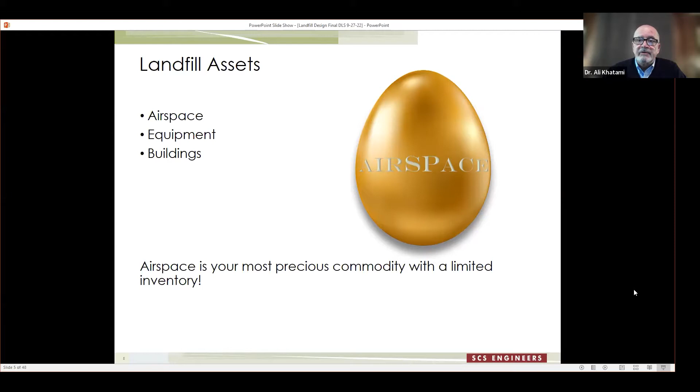As we all know, it is almost impossible to come up with a greenfield landfill site nowadays, unless the owner wants to spend a ton of money over a very long period of time to overcome all the hurdles associated with regulatory, zoning, public opposition, and all of those over a very long period of time. And if they get lucky, they will end up with a greenfield site for a landfill. Short of that, it's the existing landfills. Existing landfills are the primary assets for solid waste operations, management of waste for the communities and serving the communities.

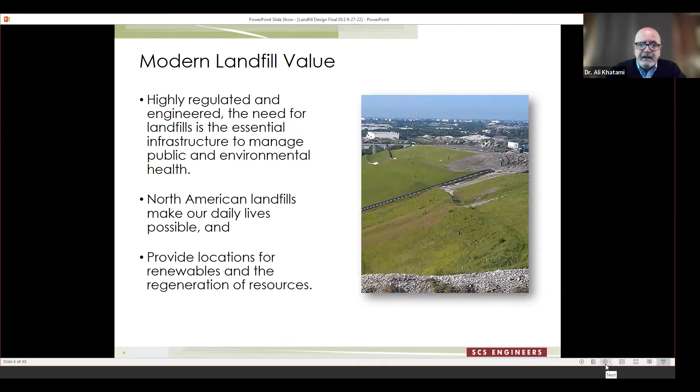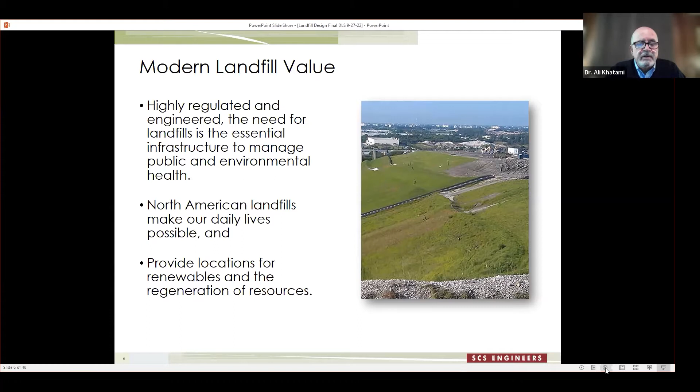And we all know that the cost of disposal keeps growing because the cost of fuel keeps growing, the cost of materials to construct the landfills keeps going up, wages are going up. So as a result, the cost of disposal keeps going up while we have a limited airspace available according to the permit. Recycling and beneficial reuse of waste is certainly helpful in the process, but there's always some residuals that have to go into the landfill. And over time, it adds up. It's a large quantity that has to be managed in landfills.

So it's essential that we make the life of the landfills longer than what they may already be in accordance with the permit, and try to maximize the life of the landfills. That plays an important role in the prosperity and economic growth of the communities, whether it is a private sector landfill or a public sector landfill. In both cases, these landfills provide an essential service to the communities around the landfills and beyond.

On the planning side of landfills, I have seen, for example, through RFPs or communications with the municipalities that are owners of the landfills, many cases where they plan for an expansion to an existing landfill for 20 years of life or 30 years of life. That's good and dandy, but keep in mind that 20 or 30 years is not a very long time when it comes to landfill systems.

It may sound like an extended period of time when you're at the beginning of a 30-year period, but when you go into this process 10 or 15 years down the road, the remaining life doesn't seem impressive in the long-term planning of the landfill. So our recommendation is go for the largest amount of life you can for your landfill, way beyond 30 years, because life goes on beyond that, and the community needs service from landfills beyond 30 years.

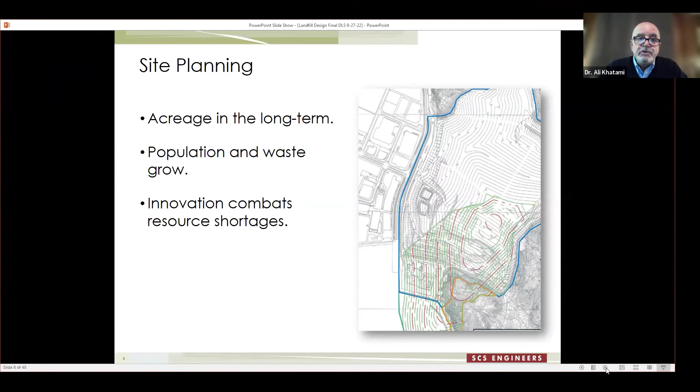So it is important to innovate, it is important to come up with new ideas. In general, we have come up with three-step principles.

Number one, for a specific property owned by your client, by the owner of the landfill, optimize locations and size of various facilities and operations. For example, you need a footprint for the landfill, an area for citizen drop-off, recycling, composting, whatever operations you want to have. Optimize the areas, locate them to suit that operation for a long time, and also achieve a very good size footprint as much as you can.

Then within that footprint for the landfill, come up with designs that maximize the airspace, and optimize the elements within that landfill design to maximize your airspace.

And in the long run, be prepared to downsize facilities around your landfill. Eventually you get to a point where you want more footprint, you have to modify your permit, and you need land to expand the landfill laterally. In that case, you would consider eliminating or relocating certain ongoing facilities on site, relocating them to an area which may not be effective for landfill footprint, or moving off-site to another location in order to open land for lateral expansion. These are the three principles we keep in mind in landfill development.

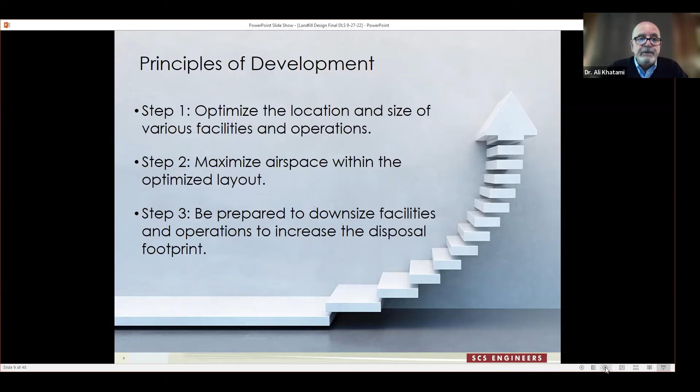Next, when we go to best practices, we are going to go over a few things. First, we start with those elements that we think should not be on the table for consideration. Number one, please do not place borrow pits in the path of future expansions.

That is wasting airspace. Borrow pits should be placed in areas that are not effective for landfill footprint, or on a non-contiguous property but close by that minimizes the hauling distance. I have seen many cases where I look at the aerial map of a landfill and see a big borrow pit right next to the footprint. I say, gosh, there is so much airspace wasted because the borrow pit was placed in the wrong place.

Another one, leachate sumps. When you come up with a location for leachate sumps, think of future expansion, whether these sumps are in the path of future expansion. Leachate sumps basically eliminate the possibility of laterally expanding the footprint in that direction. So you need to be very conscientious about future expansion of the landfill. If you're planning for 30 years of life, which I don't recommend, as we discussed before, think of a 100-year life for that landfill and then design the 30-year life footprint based on future expansions that could be possible.

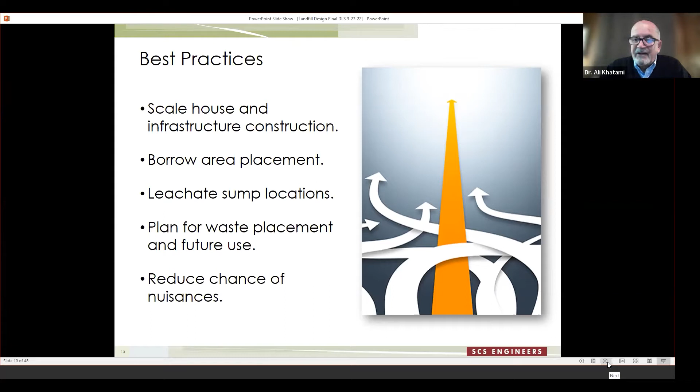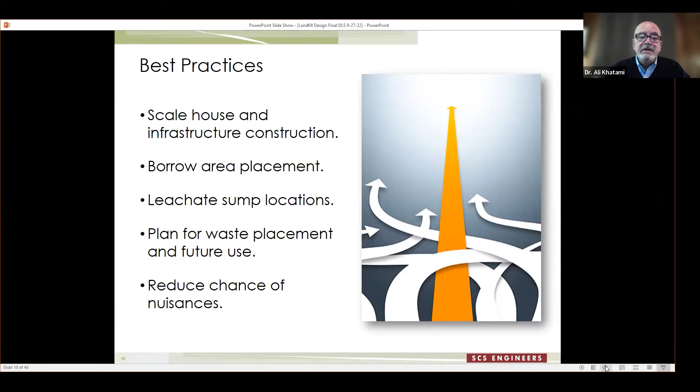And another option, this is a personal opinion, for those who have such facilities in place, please don't take it personally. I have seen over the years glorious scale houses built like Taj Mahals at the entrance to the facility, in the middle of a very large open area. This not only makes the scale house super expensive for no good reason, but also eliminates the possibility of expanding the landfill footprint over that open area. So be reasonable in locating the scale house, its orientation and location, in consideration of future expansions, because you're going to need to expand 20, 30 years down the road.

Ali, one of the comments that was made, and I thought it was a good comment, was that obviously if your cell development is moving forward and you can use the area and excavate materials ahead of your cell development, I think that's fine, and most people do that. I think you were getting at: don't put a borrow pit that's going to have to be there for a long time, getting in the way of what you need. That's the thing to keep an eye on.

That's very correct. That's coming up, as a matter of fact, in the next slide we are going to go over. I have a bunch of items to share with our audience here, a bunch of do's. We went over the don'ts, now we're going over the do's, exactly what you just mentioned, Bob.

If you have a very large footprint and you're not going to get to a certain part of it for another 20 or 30 years, consider leasing that portion out for various operations, private sector use, or agricultural use, so you can use the tax benefits of it. For example, I know of a landfill that leased out a portion of a future landfill area to a third-party facility that built a $4 million metal recycling facility. This facility has been on the permitted footprint for at least 10 years so far, but 30 years down the road, when the footprint gets to that area, the operation can easily be abandoned, the building demolished, and a cell constructed.

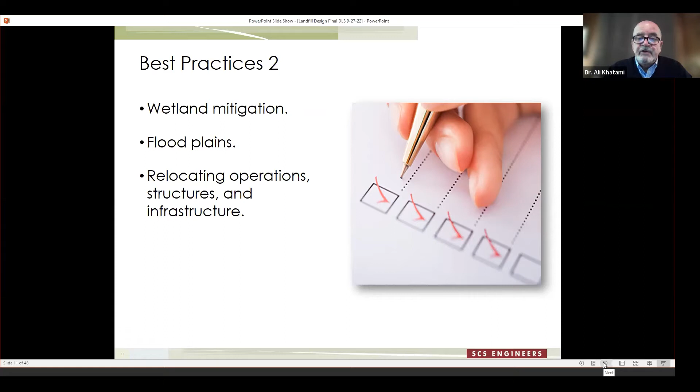There are many sites with power lines on them, creeks, wetlands, floodplain. Our suggestion is to consider relocating them. We have done the relocation of 300,000 volt power lines around the footprint of the site in order to open space for a landfill footprint. Creeks can be relocated, wetlands can be permitted to be mitigated for, and land made available for landfill footprint. The same way with floodplain - you can design flood storage capacity somewhere around the property, basically diverting flood water into that design system and opening land for lateral expansion.

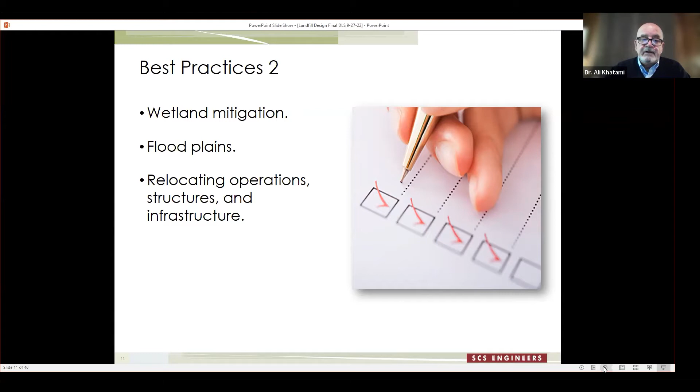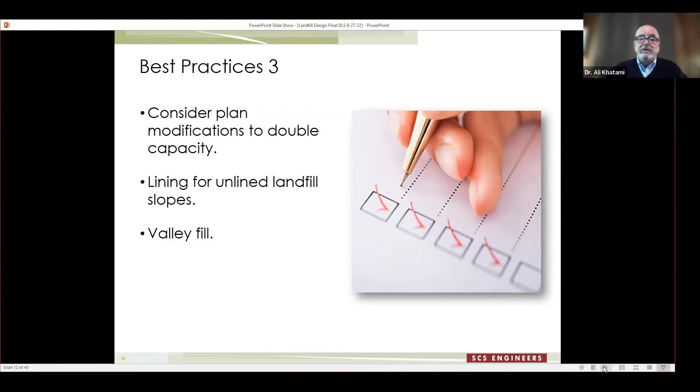A scale house reorientation could be another one, as we discussed earlier. Reorient your scale house, your scales, if you can, to open a space for landfill footprint. These are all the kinds of items that can be and should be considered in the long-term planning for your site.

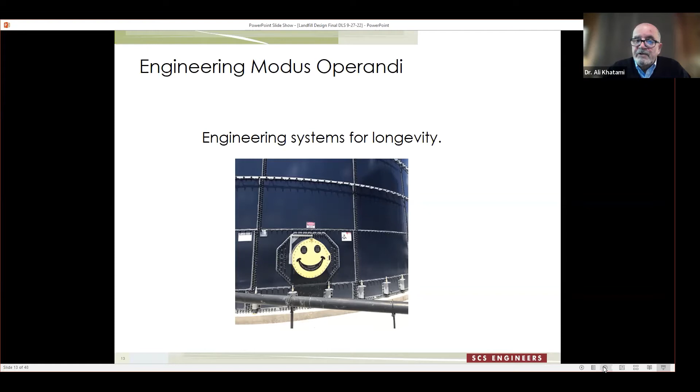Now that we've completed the discussion portion of the presentation, we are going to roll into the second part, which is all the ideas we have developed over the years that have helped us provide, give, and permit additional airspace for our clients.

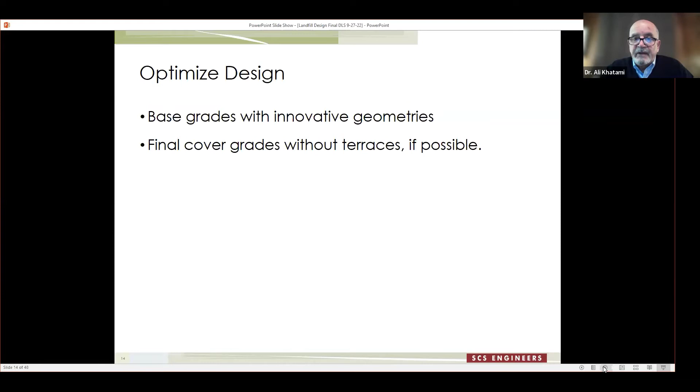In the context of optimizing design, base grade innovative geometries can add to the airspace as well as save construction material. The same way with final cover grades. Base grades are basically dependent on the slope at the base of the cell and the slope of the pipe. If you can come up with geometries that reduce structural fill volume or excavation volume for deeper landfills and reduce construction period, whatever you save on construction material, you will end up adding to the airspace. So you maximize airspace - these are all valuable exercises we need to consider.

There is also a trend in the waste management community, and that is the relationship between landfill owners and engineers. I would like to see landfill owners examine designs proposed and considered for permitting by engineers. Base slope plays an important factor in the quantity of material you will be constructing in the future - it's a cost, it's a negative to the bottom line.

Pipe slope is the same way. If the engineer puts a 2% slope or a 1% pipe design in front of you, just ask the question: why 2%, why 1%? I say this because many of us, myself included, have done that for many years - we go with the standard slopes, and then check whether the foundation settlement is still okay given those slopes. If the foundation settlement is 0.5% at the base and we propose 2%, the landfill owner needs to know that and ask why there's a 1.5% slope left that they have to fill with dirt. Why not make the base slope 1% if the settlement is 0.5%?

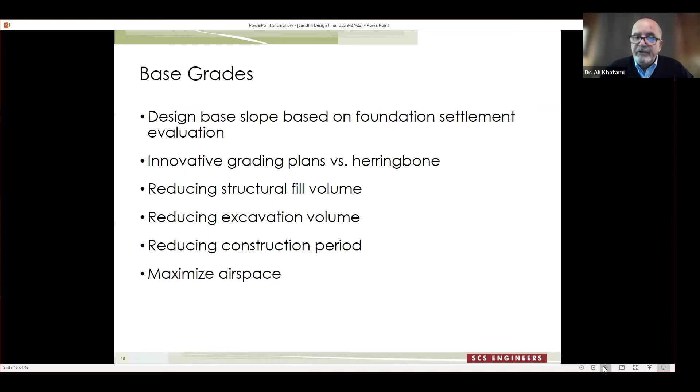Encourage your designer to be innovative in giving you additional airspace.

I personally have never designed landfills with terraces, and I have been in this business 35 years. Terrace system is a very, very cumbersome system, whether it has to do with operations or with the design of the final cover, because so many different elements come into the picture of final covers. When you have terraces on the landfill, these features become very, very complicated.

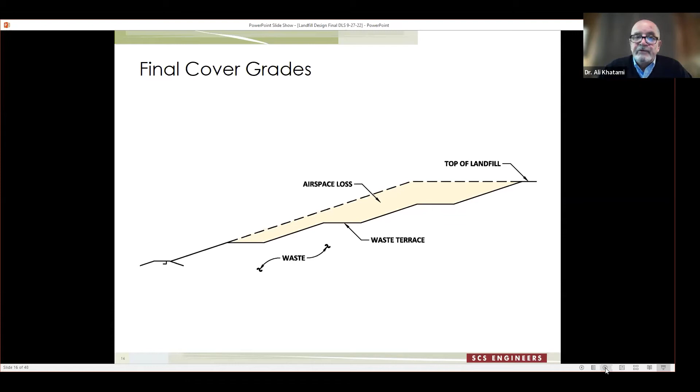Three-dimensional geometry has to be met in terms of stability, in terms of water flow to the swales, to the ditches, water flow through the downchutes, all the geometric features that have to come together to make things possible. And you accomplish that more on the final cover system in terms of tack-on berms to deal with the long slopes and breaking those slopes up, right? That is very true. Next slide, you're gonna hit on that.

If you have a straight 3-to-1 slope, the tack-on berms and swales would be on the slope, and it can be located wherever necessary at the time of construction of the cover system. Cover system normally gets constructed in partial features, and the location of the swales plays an important role in the partial closure designs. If you have terraces, it's very difficult.

You're set with the location of the ditches on your cover because the terraces are set, and you have to spend a lot of money on additional soil in order to create the longitudinal slope and the transverse slope on the terraces to make things happen. At the end, when you come to the low point of these terraces, it's a very complex geometry, making the pipes fit together with the downchutes and the lateral chutes that drain the swales.

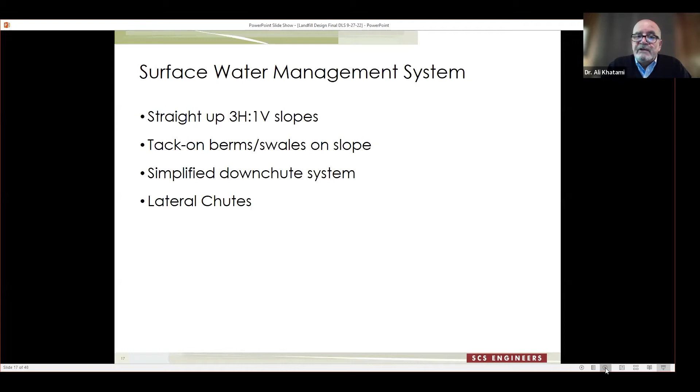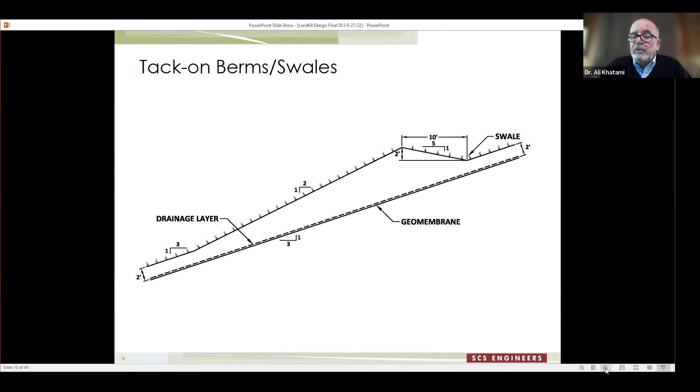So when you go to the straight up 3-to-1 slope, the downchute is a very simple system, and there are lateral chutes involved. This is a typical cross-section of a tack-on berm. Straight up geomembrane and the drainage layer above it. The 2-foot thickness, for example, is a straight up with some sections added soil to create the swale behind it. Again, the swale would be sloping at 2%, 3%, whatever your design needs to be. And you can adjust the size of the swale depending on the runoff quantity reaching each swale.

When we come to the downchute, it's a very, very simple downchute system. Two pipes. Normally I use two pipes. You can design it with one pipe, with two lateral pipes.

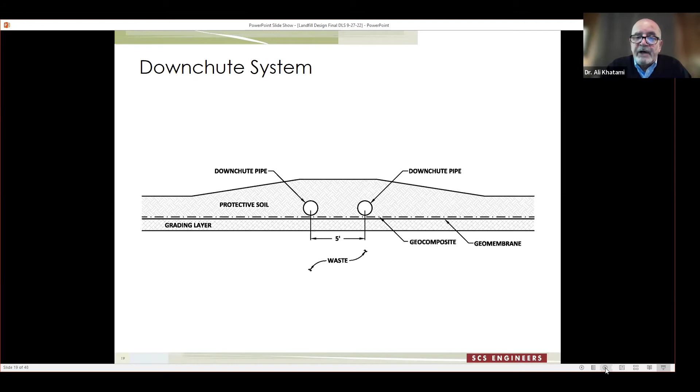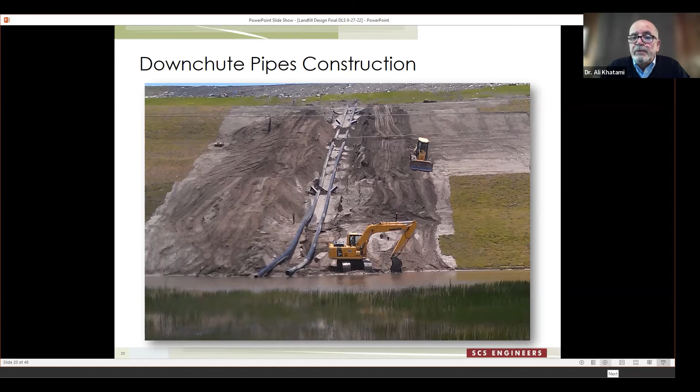This is a picture of a construction of the cap. The two pipes that you see are the downchute pipes, and the stickouts are the lateral pipes that connect the downchute to the low point of the swales. All these pipes can be fabricated off the slope and pulled over the slope and soil pushed around it. It's a very simple construction.

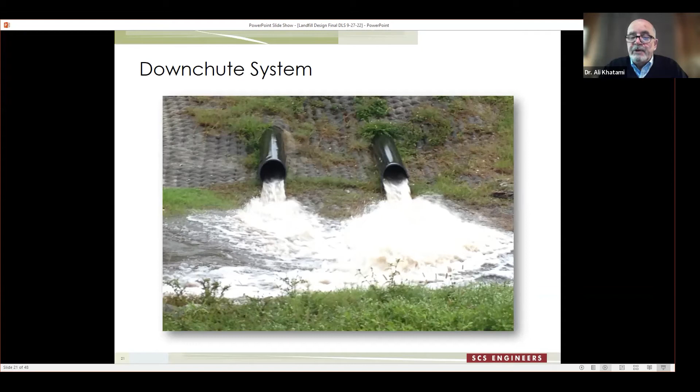This is the outlet of the downchutes. We normally put fabric form around it, which acts as the energy dissipator. And this system is very efficient in conveying water from the slope through the swales, through the downchute to the bottom perimeter ditches. And you've deployed this in some of the rainiest parts of the United States.

Yes. The first system that we constructed of this type goes back to 1997. We have never had to go back and do any maintenance on it, and it has been performing well without any problems all these years.

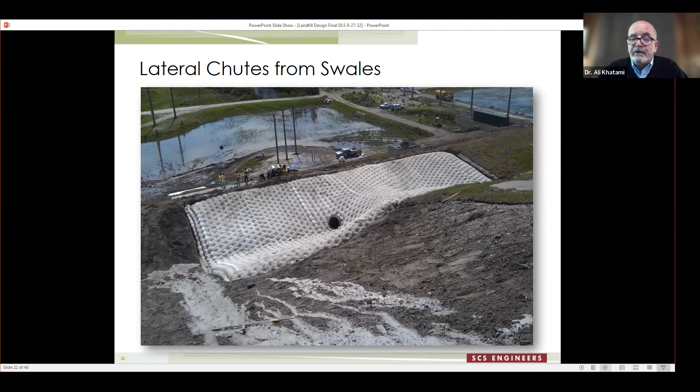This is a view of the lateral chutes at a certain swale level. The pipe opening is the opening to the lateral chute connected to the downchute, which is in the hump between the two lateral chute inlets. There's another one that you don't see in this picture. And these pipes are located at the low point of the swales. The downchute runs from top to bottom of the slope in the hump that you see between the two openings. Again, it's a very simple, straightforward construction and very effective. It's not like the geometries that you have to deal with in the terrace system.

Now let's touch upon a few things about the gas and leachate. We all know that landfills have to carry leachate to the bottom and gas to the top through the vacuum system. Some landfills are very thick, 200, 300, 350 feet. We are approaching landfills with 400 feet of waste. So you can't really install gas wells at the end of the life and cover only 100 feet of the 400 feet of waste.

Leachate can flow down through the entire thickness of waste, and gas can flow up through the entire thickness of waste. It is a matter of constructing it in a proper fashion.

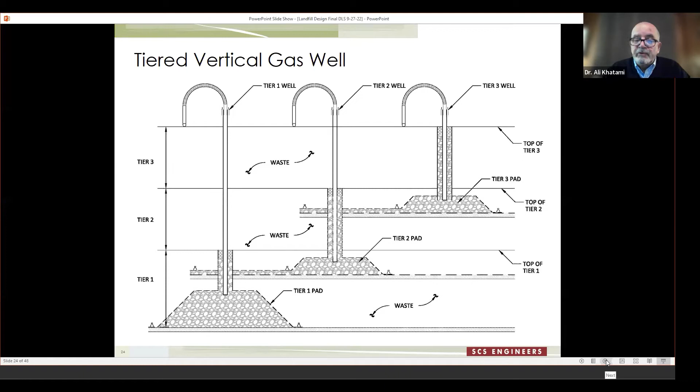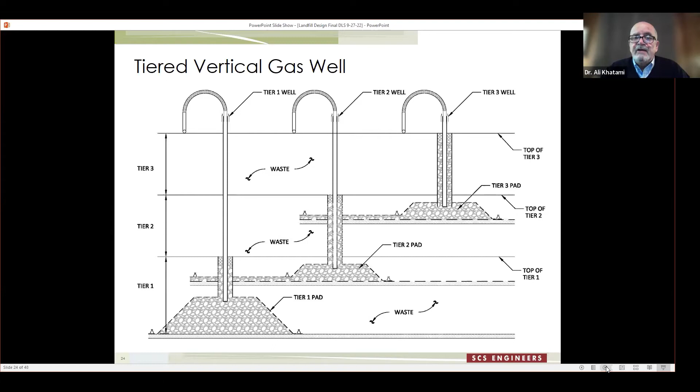Going through the details of construction of this system is outside the scope of this presentation, but we have a very detailed way of constructing this system in a very effective manner that allows us to control gas emissions every step of the way, and you end up with a proper system for moving liquids down to the bottom and vacuuming the gas out from the entire vertical column of waste.

Each pad can have fingers sticking out on a horizontal level. These can help collect liquid from perched zones of leachate or convey gas to the main well that is connected to the pad for removing gas from the landfill.

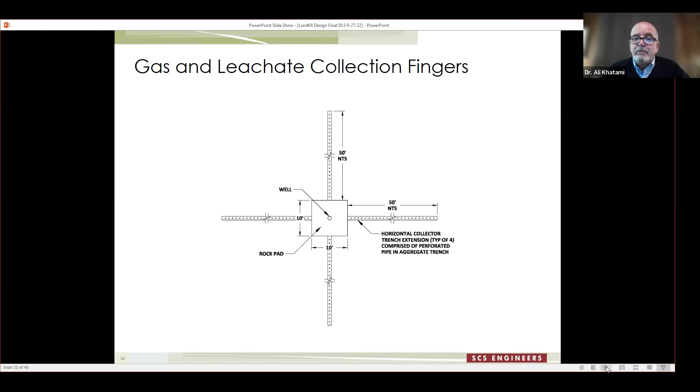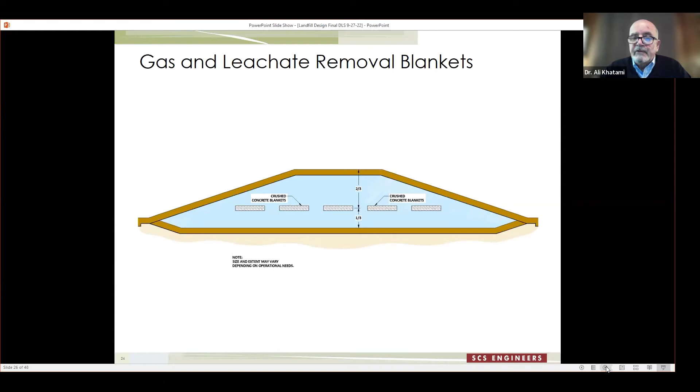They are very inexpensive to construct. They can go anywhere the operator deems necessary, and they help remove leachate from perched zones or remove gas from areas that need it.

Then we install a very inexpensive piping system on top of the sand near the completion of the cell. These pipes extend to the outer limit of the cell, and they can be connected to the vacuum system to remove pressure from the bottom of the landfill.

I have had cases where pressure was so high near the bottom of the landfill that it affected the flow of leachate through the geocomposite void. I was standing right next to a composite that had 2 inches of water standing on it, but not flowing down the slope through the composite.

That is only due to high gas pressure that fills all the voids in the sand as well as the geocomposite and can affect the flow of leachate through the composite. With these pipes, you can easily address that matter and make your investment do what it needs to do.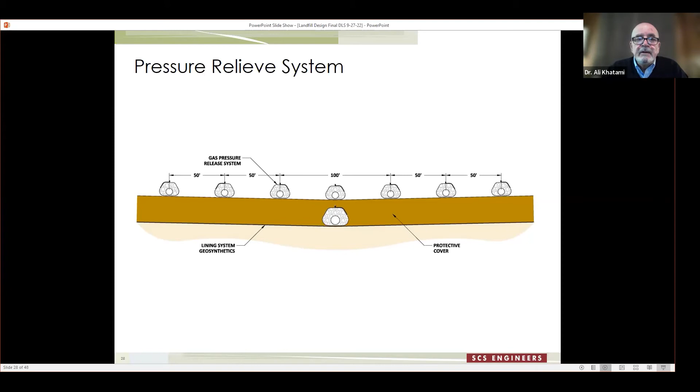You invest a lot of money on the drainage layer, on the geocomposite leachate collection system, and if it cannot perform, it's just a waste of money. These little pipes connected to the vacuum can easily make it possible for leachate to flow easily to the leachate collection system.

We also connect all the risers to the vacuum. Many engineers do that nowadays. It can be connected to the LCS cleanout, the LCS pipe cleanout. It could be connected to the riser of the primary system in a double lining system, or to the riser of the secondary portion of the lining system. All can happen right behind the structure near the sump. It's fairly easy and very practical to do.

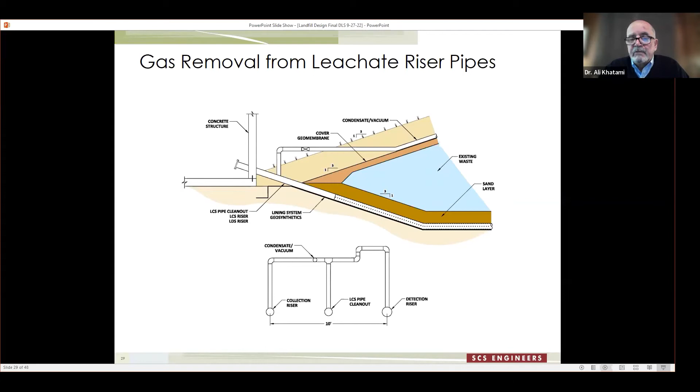And then the pipe, the vacuum line, goes up to a gas header, or it goes to a gas valve to apply vacuum to it.

Condensate system: we have all seen condensate sumps constructed on landfill slopes, gas headers at 5% slope constructed on the side slope of the landfill, condensate force main, compressed air lines, all of those on the side of the landfill. These are major components of the gas management system, the liquid and gas wells management system.

What we are proposing, what we have been doing for the past many years, is to put all these systems in the perimeter berm of the landfill. When you install it in the perimeter berm, there are no settlements involved anymore. The gas header can be constructed at 0.5% slope instead of 5% slope on the landfill.

The condensate force main all in the perimeter berm, the compressed air line in the perimeter berm. All of these can be constructed at the time of new cell construction, and all will have stub-ups that can be connected to in order to bring these services over the landfill surface to the gas wells, in terms of vacuum or condensate force main or whatever liquids are needed from the gas wells.

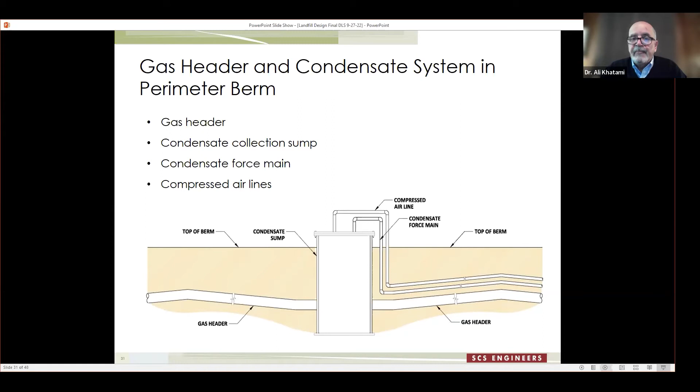So Ali, I think this gets back to one of your earlier comments regarding really thinking ahead, thinking 30, 40, 50, 60 years ahead, and the infrastructure you need to support your landfill life. If you can get that in early, in places where you won't have to deal with settlements or those kinds of issues, you're probably ahead of the game with regards to the performance of those systems. You're absolutely correct, Bob.

I'm glad you mentioned that. This is all long-term planning. This is all being able to see, as you said, 30, 40, 50 years down the road. Your field of vision should not be on a 10-year or 20-year basis. It should be a much longer field of vision in terms of planning for the landfill.

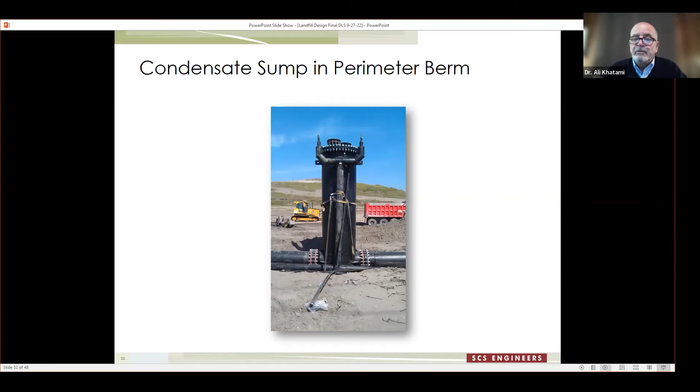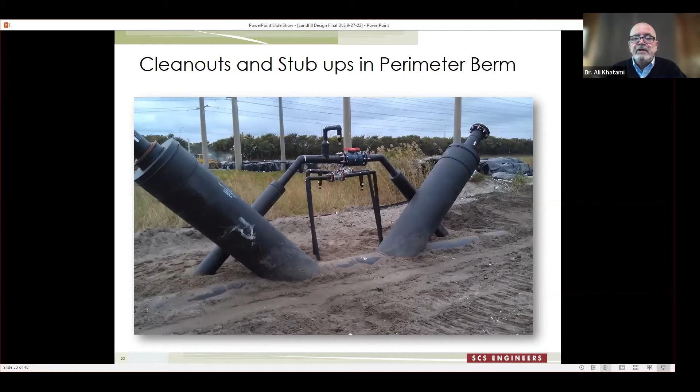This is an example of that condensate sump that is in the perimeter berm, which is going to be constructed around it. These are the cleanouts to the gas header, again in the perimeter berm. The stub-ups for the compressed air lines, stub-up for the leachate condensate force main - these are all sampling ports with valves to close off sections if needed. These will be very accessible to the maintenance crew. They can easily reach it and do their maintenance without struggling or having to get on the 3-to-1 slope to do any sort of maintenance.

Leachate collection pipe and gravel - this is an important matter, and I'd like to share this information closely with our audience. One of the problems that happen at the leachate collection pipe and gravel is the clogging of geotextile. There's always a textile that wraps around the gravel containing the pipe, and there's always a textile as the upper layer of the geocomposite drainage layer. So the leachate flowing down the slope in the composite, within the geonet component, has to pass through the upper geotextile of the geocomposite and through the geotextile wrap of the leachate collection pipe gravel setup, and only then can it enter the gravel and then the pipe.

The passage of leachate through two geotextiles can cause serious clogging of the geotextile over the long term. So we came up with a design - we came up with one like this, and a different one that eliminates the possibility of clogging. Here we basically eliminated those two geotextiles from the design altogether, and the leachate in the geonet flows directly into the gravel and into the pipe, without passing through any geotextile that would cause clogging. This helps the system remain healthy and effective for removing leachate from the cell through the leachate collection system.

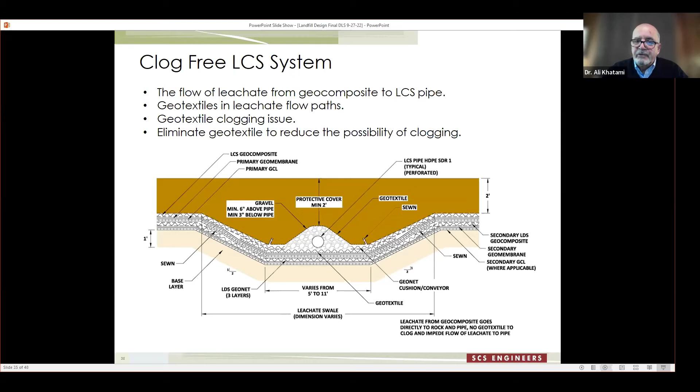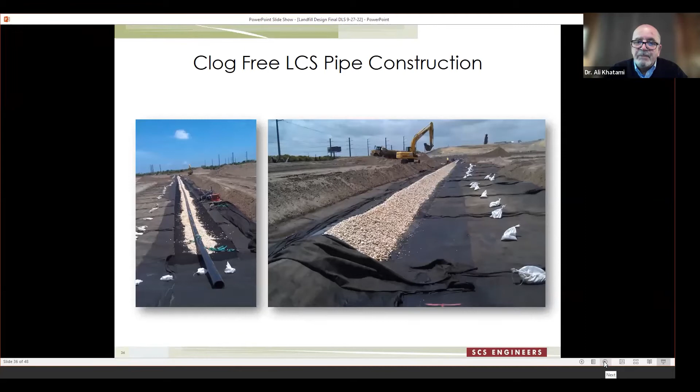Next, these are some pictures during construction. The one on the left shows the layout, the layers below the pipe already set - a few inches of gravel below the pipe, which sits on top of a few more inches of gravel. The next picture on the right shows the mounding of gravel, and the textile goes only over the gravel, not wrapped around it. This eliminates the wrapping textile. On the left, we eliminated the upper geotextile of the geocomposite. So by eliminating these two geotextiles, you eliminate the very high possibility of clogging in that system.

Leachate seeps - there's a common perception that when you install a covered geomembrane, all the seeps disappear. I have news for you, fellows, my colleagues: seeps keep going. Seeps continue if the source of the seep is not directly below the geomembrane you install. Seeps continue flowing down the slope directly below the geomembrane to the toe of the slope.

I can tell you, in 2020 I had two cases that ended up with ponding of leachate seeps below the covered geomembrane, and they had to excavate the soil. They had to open the geomembrane, remove the water, close the geomembrane, put the soil back - and only by doing so, they restart another cycle of the same problem that was going on over the past 3 years that they just repaired. The same cycle shows up 3 years down the road, and you have to spend a ton of money to repair it again, doing the same thing.

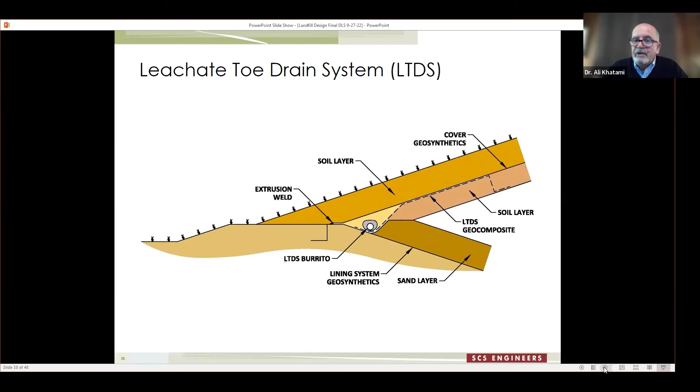We've done this for the past 20 years. Basically, I think we were the inventors of this idea 20 years ago. I had never seen any designs that would have a leachate toe drain system in it 20 years ago, and we developed it, and we've had very good success with it.

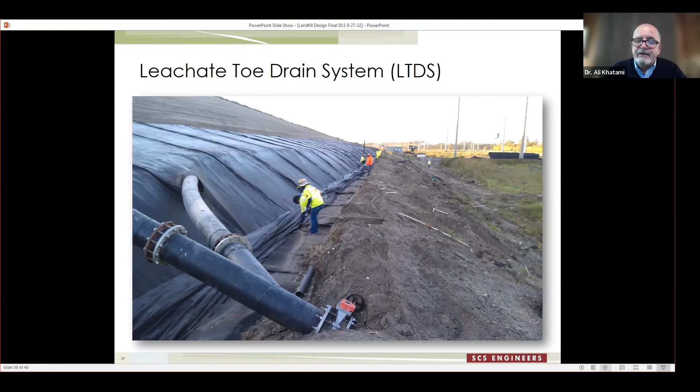This is an example of it. The panel you see on the slope is the geocomposite component of the leachate toe drain system. The burrito that the fellows are standing next to is the leachate toe drain burrito. This entire system goes under the cover system geomembrane that gets welded to the bottom geomembrane. It's completely sealed, and any liquid coming down the slope below the cover geomembrane gets collected by this system and diverted back into the leachate collection system within the lined area of the landfill.

A similar but different system will be above the cover geomembrane, which we call the rainwater toe drain system. Basically, rainwater that percolates through the upper soil of the closure gets into the composite and flows down the slope. I have seen many different designs out there by different entities, but we've had very good experience with this system.

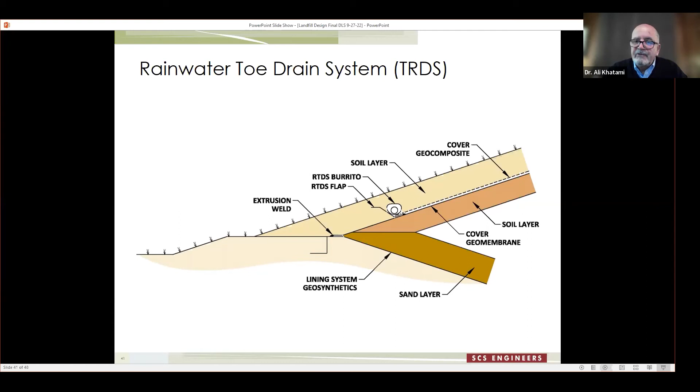We've been constructing this for close to 20 years at our landfills. It's a simple construction: a geomembrane flap, and the area behind it is where the burrito sits, receiving water from the composite. At certain points, we have a lateral pipe draining the liquid into the perimeter ditch. Very simple, inexpensive system, very effective, and maintenance-free.

As long as the slope remains intact, there's no problem impacting the flap. This stays in there, and I haven't seen impact to the flap after completion of the cover system at any sites.

This is one of the questions that was asked, going back to the leachate toe drain issue: have you had any experience of scaling with mixing toe drain liquids coming below the cap with the leachate sump liquids?

Not really, because the amount of liquid reaching the leachate toe drain system isn't much. The amount of liquid coming out of the seeps, even before placing the geomembrane, isn't significant. You see a small stream coming out. Once you put the geomembrane on it, some of these streams persist, and the liquid gets into the leachate toe drain system, but it's not a very large quantity compared to what you collect from your leachate sump, which could be on the order of 800 gallons per acre per day coming out of a typical leachate collection sump. But the amount of seep you collect and divert to this sump is a small quantity.

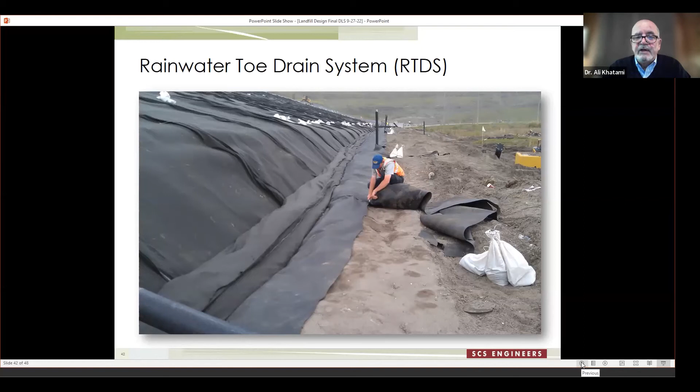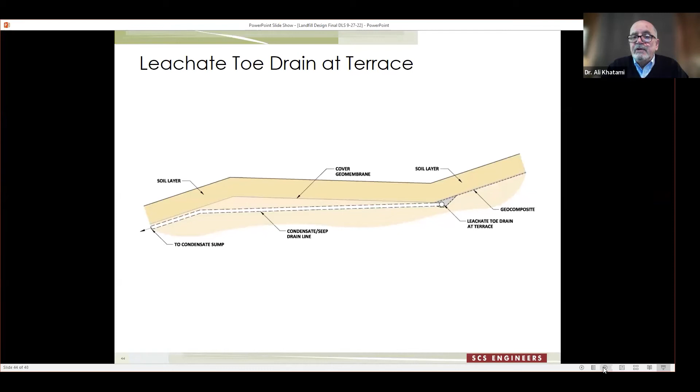I'm going to move fast. Like I said, with the terrace system, it's the same thing. I have seen terrace landfill cover systems installed but with no toe drain system built into them. You need a leachate toe drain system at every terrace, and you need a rainwater toe drain system at every terrace to address the liquid in the composite. This is a complex geometry that you have to be able to handle in the field if you have a terrace system.

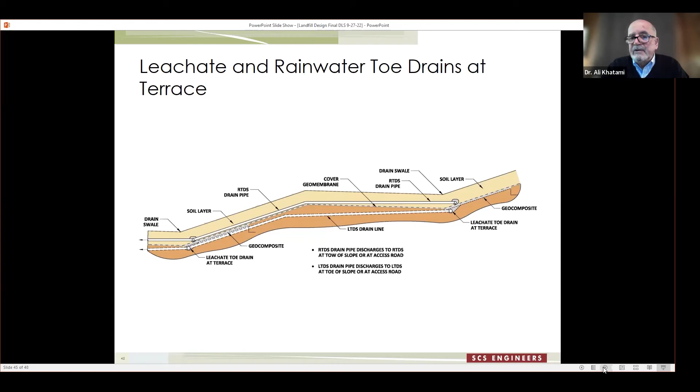Also, in the ditch next to an access road, you need a rainwater toe drain above the cover geomembrane and a leachate toe drain below the cover geomembrane. These are essential components to keep the system intact and stable, and this system has to be able to perform for a long period of time, maintenance-free.

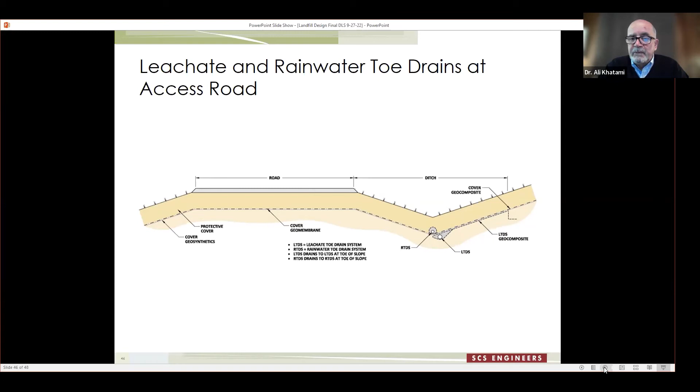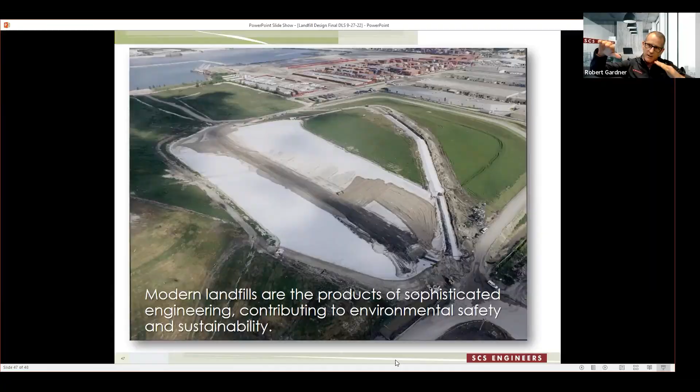So Ali, when you're doing, let's say, tack-on and you're putting your rainwater toe drains above the liner, do you recommend putting anything as you're going up the slope? Are you putting anything up on the slope where you have the tack-on berms, or is it just a layer of geotextile or geogrid above it, some distance up from the bottom?

On the tack-on system, the geocomposite is straight up on a 3-to-1 slope. You go all the way up, not just partial. Of course, you construct them in partial closures. If your slope is 450 feet long, you may build it 150 at a time, three partial closures, one on top of the other, continuing the geocomposite above.

Geocomposite drains the entire length. You need to design the geocomposite to be able to manage the liquid that reaches the composite. Of course, that's part of the design of the drainage layer in the cap.

All I'm saying is modern landfills require sophisticated designs, and we engineers need to be able to come up with innovative designs, not only to maximize airspace, but to make the systems we design require less maintenance. Reduce the amount of maintenance, because every repair that's done is a negative to the bottom line. The intent is to maximize the asset and the bottom line of the landfill.